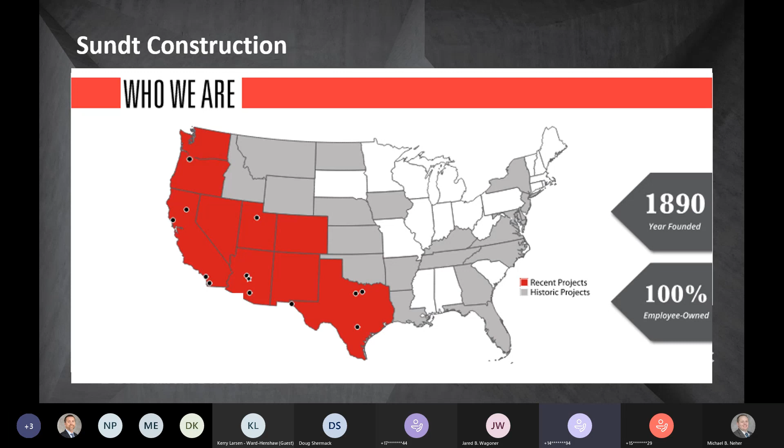This looks a lot like a typical pre-bid meeting. We're not calling this a pre-bid meeting. This is more of an informational session to give you guys an early look into the process so that you can see what's involved and be better prepared once we do advertise. And once we do advertise this for bid, we will have an official pre-bid that we will ask you to participate in.

Sundt is very big on providing safe job sites. We always want our craftsmen to go home the same way that they showed up to the job site. And to support that, we always start out all of our meetings with a safety share.

Today's safety share is regarding innovative PPE. Sundt is a company that we feel like we're always on the cutting edge of innovation, especially when it comes to things like technology, BIM modeling, 3D technology, use of drones. Those things are what you think of when you hear about innovation in the construction world. But today we wanted to talk about some of the innovation we are working on with our partners in PPE.

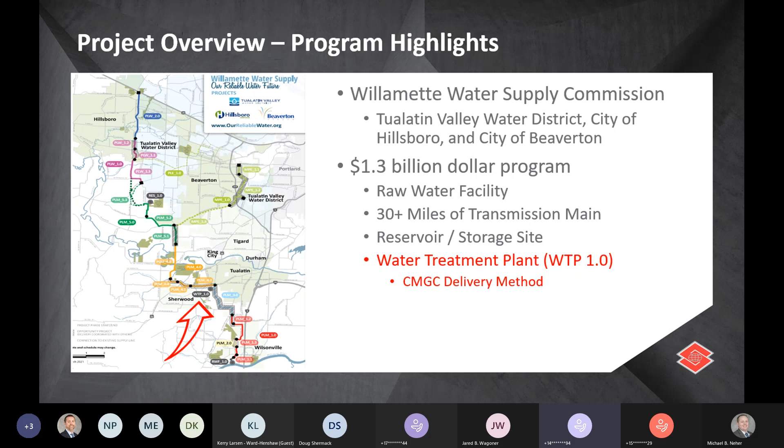So our project, though, consists of just the water treatment plant. Again, somewhat hard to see on this map, but we've got the arrow pointing to it here in Sherwood. The water treatment plant is a 60 MGD brand new greenfield site water treatment plant, and it's being delivered through the CMGC delivery method. So what that means basically is Sundt was brought on real early in the project to work with the engineer, who is CDM Smith, and the owner to help refine the design through value engineering, optimizing the project, providing various cost estimates throughout the process to help deliver a high quality project within the owner's budget.

Zooming in a little bit closer, the project is located basically at the southwest corner of Southwest Tualatin Sherwood Road and Southwest 124th Street. It's basically a greenfield site that is heavily forested. The site was strategically chosen for the water treatment plant. One thing to note with the location is the site or the facility is pretty much all basalt rock. So what that means is when it comes to the excavation, there'll be a significant amount of blasting to be able to remove that rock.

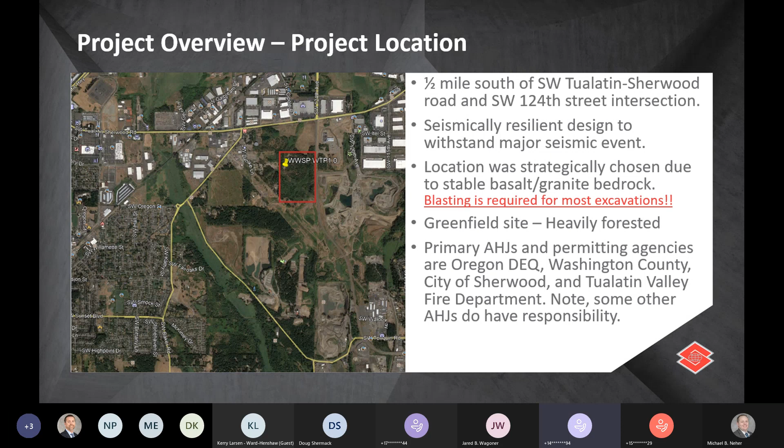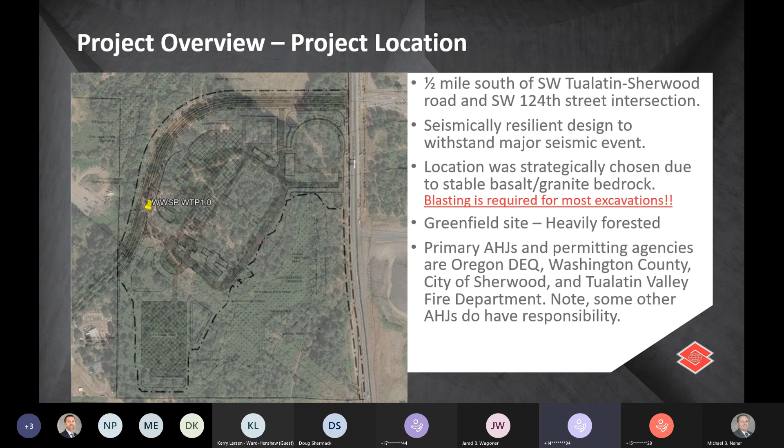We are going to be working with several AHJs, or authorities having jurisdiction. We've got some of them listed right here: the Oregon DEQ, Washington County, City of Sherwood, Tualatin Valley Fire Department. As I said, there are several, and we may not have all of them listed here, so we'll be working with a lot of different entities.

All right, so this slide here shows the overall site plan of the various new structures. I just wanted to hit on a couple of the stats. We've got about a 23 acre site, again all greenfield, nothing is there right now except a bunch of trees.

The water treatment plant consists of several treatment areas, and I'll walk through what some of those are in a couple slides later. We've got about a 15,000 square foot administration building. As with any water treatment plant, there's a lot of structural concrete. Based on our takeoffs, we've got about 40,000 yards of concrete.

Earthwork, significant amount of earthwork. The middle of the site is kind of a hill, so obviously that needs to get graded out. So we've got about 65,000 yards of cut and fill, about 180,000 yards of structural excavation. For those of you that have worked on water treatment plants, a lot of the structures are deep tanks excavated down into the ground, so that results in a lot of excavation.

You'll see in some slides later that we've got a significant amount of underground piping, and with that there'll be a lot of excavation associated with that. We're calculating in the neighborhood of 120,000 yards of pipe excavation.

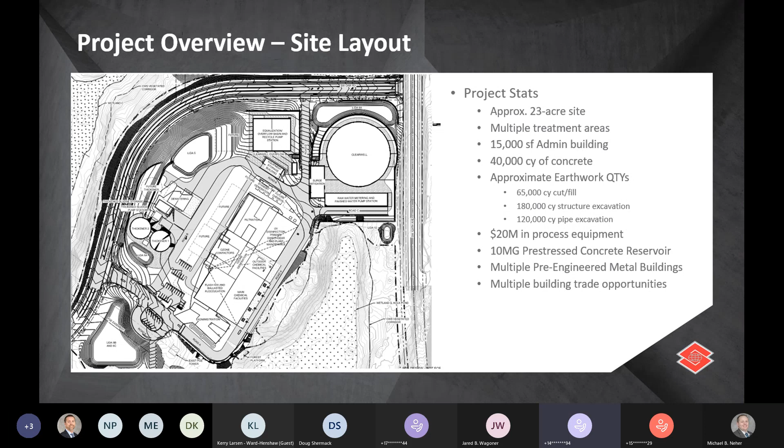All right, so zooming in a little bit further, I wanted to walk you through the layout of the facility and the treatment process real quick. This image right here is a 3D model of what we call the process building.

Over in the back left, you can see the call out for the administration building. That's that 15,000 square foot building that I mentioned. That's where your operations staff and members of the ownership group will have their offices. It's also got a lab facility in there where they'll do their testing of the water quality and things like that.

To the right of that is really where the water comes into this facility - that's the ballasted floc process area. After the ballasted floc, to the right of that is the ozone generators and the contactors, and then the water flows from there over to the filters. That's where the fine particles are removed from the water prior to going down into the UV disinfection structure, which is just the lower part of the picture where the filters are.

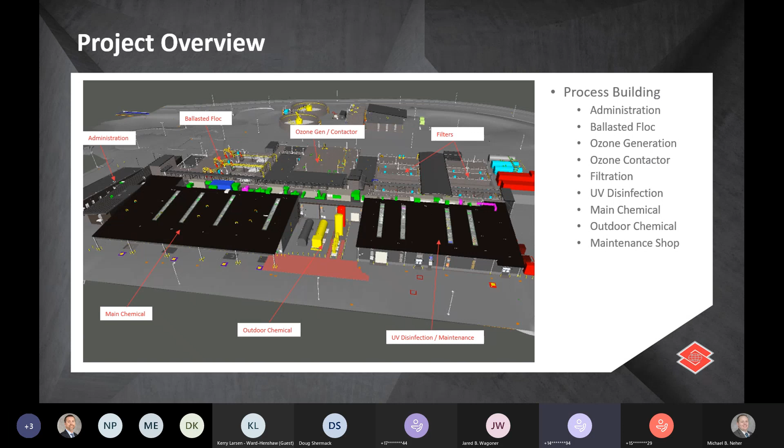In addition to those treatment processes, there is some chemical addition and adjustment to the water. So on the bottom left, the big dark rectangle, that's where the chemical facilities are housed, the main chemical indoor facilities, and then to the right of that is your outdoor chemical, which is your CO2 and liquid oxygen storage. So let's go to the next one.

All right, so we have two images right here. These images are of the same structures. The one on the left is basically looking out across the EQ and the clear well from the vantage point of the site. The image on the right is basically standing on the corner of Southwest 124th Street and Southwest Ore Drive. Southwest Ore Drive is the street that runs off of 124th and goes along the perimeter of the site on the north and west sides.

Looking at the picture on the left, in the front at the bottom, you've got the EQ overflow. That's basically a large, deep structural concrete tank, excavated in rock.

Lots of concrete used for storage of overflow water. Then in the background, that's your round tank, the clear well I mentioned. It's a 10 million gallon pre-stressed reservoir.

To the right of that is the finished water pump station. This structure houses some pretty large vertical turbine pumps that distribute the water through the transmission lines. That finished water pump station is a pre-engineered metal building.

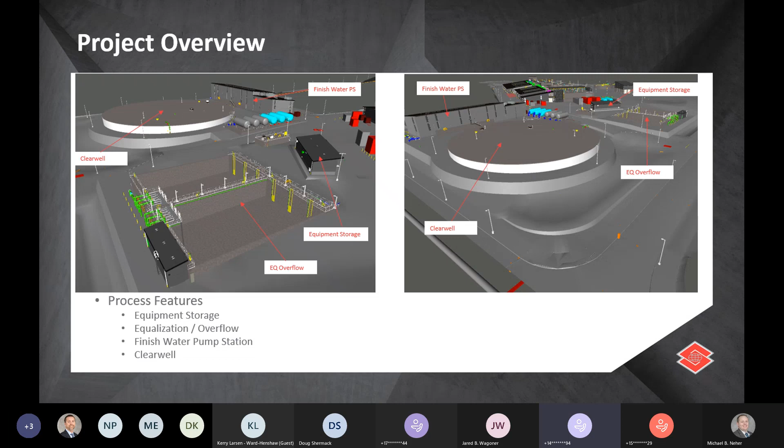Then to the right and towards the middle of the image is the equipment storage building, another one of the metal buildings on site. This is basically a large storage building, kind of like a big open shell for operations to store their equipment.

The last area we're going to look at is the solids handling facilities. As you treat the water and filter it, small particles get pulled out and accumulate, and you need to manage those particles or solids. To do that on this site, they are sent over to solids handling.

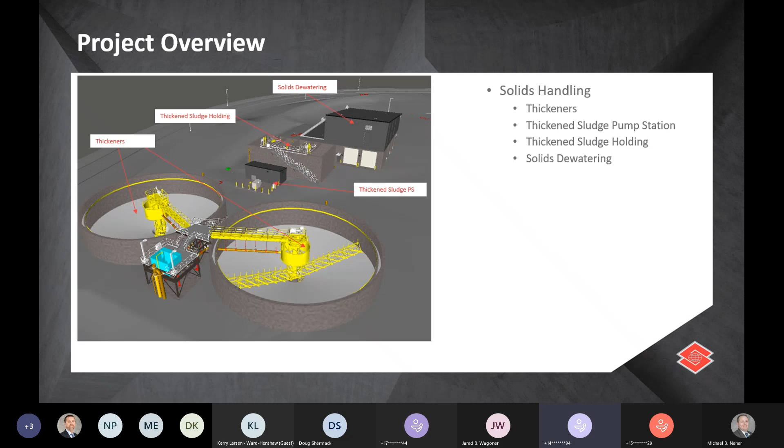The solids are extracted from the water in the solids dewatering building. This building has a couple of screw presses in it, where the water and solids are separated, and the solids get loaded into trucks and hauled off site.

All right, so now we're going to go over the project schedule. This is a very rudimentary schedule we put together, which aligns with a detailed P6 schedule we've already created. For this meeting specifically, we wanted to highlight the key areas we're talking about today.

Earthwork and yard piping are the two areas in green. The area in gray that just filled in is what our durations for concrete are expected to be. And then last but not least, the process, mechanical, and equipment.

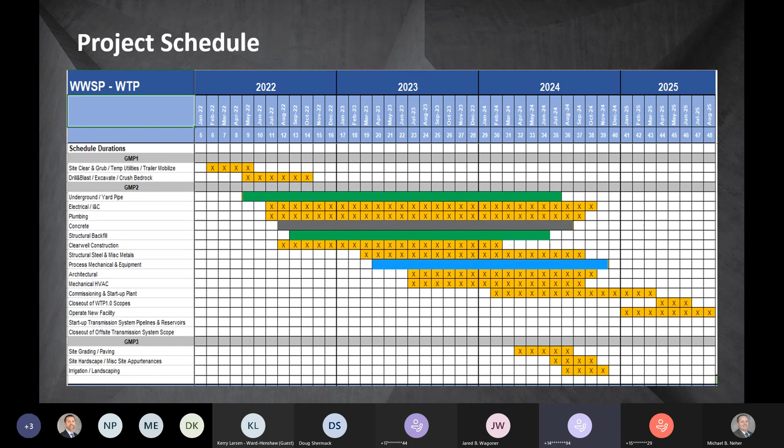So as you can see, really these three scopes that we're talking about today do cover multiple years of scope of work, and we'll go into a little bit more detail of what those scopes entail.

I just want to go over the bid schedule and bid opportunities. So talking about the bid schedule, for those of you that sat in on last week's initial kickoff meeting, we were reflecting 3 GMPs.

A recent change decided by the program is that we are going to merge GMP 1 and what was previously documented as GMP 1 and 2 into a single GMP. So that is now referred to as GMP 1. And then we will have a later GMP 2, which is more for...

Back-end type work: landscaping, hardscaping, sidewalks, asphalt, at the very end of the job. So we just wanted to convey that GMP 1 is going to entail 95% of all the scopes of work, including the 3 scopes we're talking about today.

Right now we're expecting to advertise mid-October. We'll have a pre-bid kickoff meeting within a week or two after initial advertisement. And then really, having an RFI deadline mid-November, addenda deadline early December, and bids would be due mid-December. Like I said, this was a recent change that the program and Sundt decided on.

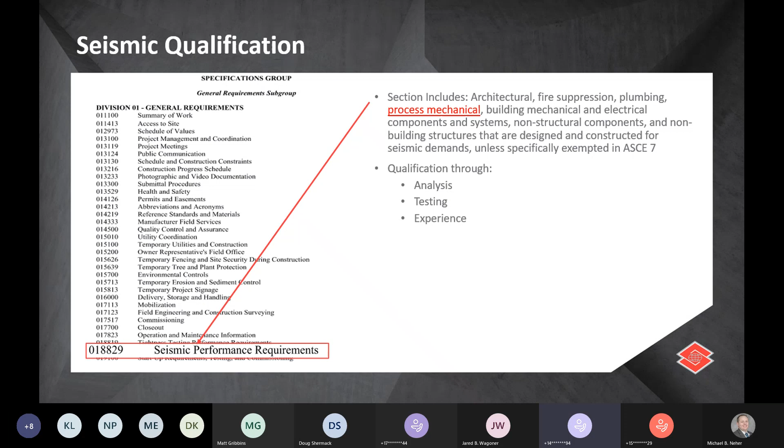All right, so now we'll get to the meat and potatoes of why most of you all have called in today. We'll be going over each division, talk about the scopes of work, kind of go through the overall scope, but then also talk about a few items or areas of concern that we see that we just want to convey to you all. So, Division 3, Structural Concrete.

As part of this package, it includes all divisions of the 03 specifications, including reinforcement. We wanted to reiterate that because sometimes there are concrete installation companies that just do formwork and placement and no reinforcement. We're expecting that the costs include all reinforcement.

The scope, like we mentioned earlier, is about roughly 40,000 cubic yards of concrete spread out across over 20 structures. We are considering splitting this overall package into 3 packages due to its overall size, and because we received some feedback from local contractors that are interested in the job but are unable to pursue a job of this size.

So with that said, we'd love to get feedback from you all to see if this scope is manageable for you, and if you support splitting it into multiple packages. We'd love to hear back any feedback you have, and I'll just leave it at that.

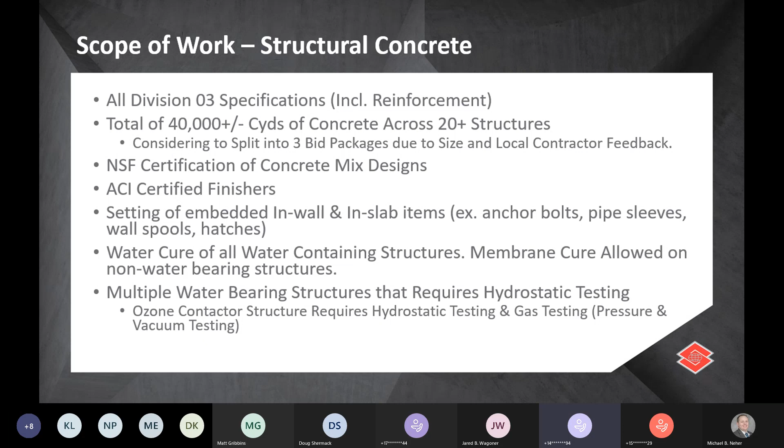Earlier I mentioned we talked about breaking the scope out into 3 potential packages, and this is where we'd like to really hear back from you all. All of the structures highlighted on the screen are what have structural concrete. The blue one, the big round one, is the clear well. That one, because it's a very specific type of construction, is not part of this Division 3 structural concrete. It is its own work package. But the structures surrounding it, shown in green, which we refer to as the finished water and EQ structures, those are part of this package.

What I want to convey here is, right now there's roughly 40,000 cubic yards of concrete. We'd love to hear back from you all on what your firms feel comfortable pursuing. If it's all of it, that's great. If it's less, depending on your experience, bonding capacity, or comfortability, please let us know.

The 3 packages we're proposing are the main process and admin building, shown in yellow; the pinkish purple color is the solid structures; and the green, as mentioned earlier, is the finished water and EQ structures. There are clear delineated lines between those 3 scopes of work that we think would make for manageable sections. The thickeners and solid structures would be roughly 10 to 15,000 yards. The finished water EQ structures would be right about 10,000 yards, and the main process building and admin will be right about 15 to 20,000 yards. Again, we'd love to hear feedback from you all on your thoughts.

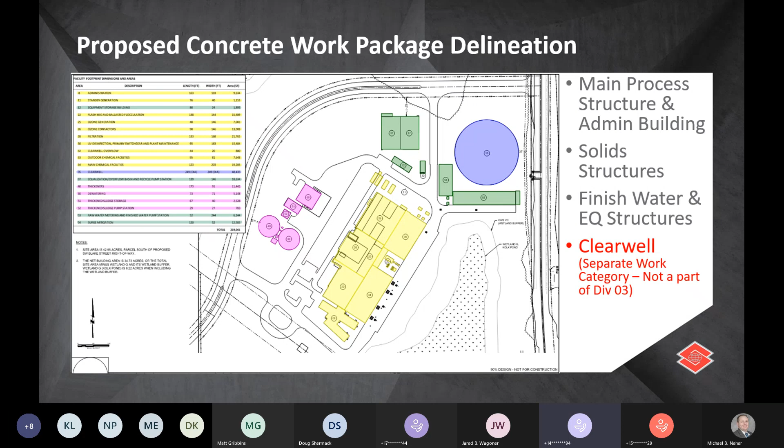Following along the lines of the proposed separation of this scope, I want to focus on the main process structure and admin building. As David mentioned earlier, this structure really includes 6 or 7 different processes. Right in the middle, toward the bottom of the picture, is your filter structure. The filter structure includes slab-on-grade as well as a deeper pit in the center, which is where your main process utility corridor is. Then you have your filter basins on either side of it with large 30-foot tall concrete walls.

You also have the ozone contactor, just up from the filter structure, which is also another large water-containing structure. That is the structure that also requires the vacuum testing along with the hydrostatic testing. And then in the structure as well, you have the UV treatment pit, which is about 20 feet down into the ground. That's really the deepest area of this entire process facility, but this building does have a lot of vertical walls and water-containing structures.

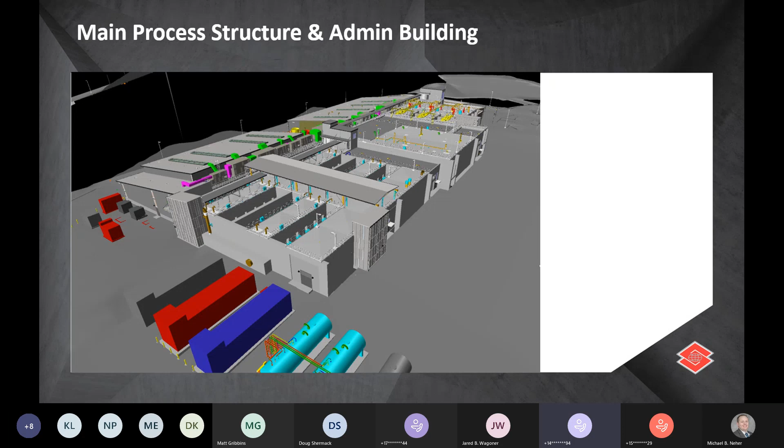Kind of a different view from the opposite side of the previous picture. At the bottom of the picture is the administration building. This administration building has a lot of spot footings and grade beams. The slab-on-grade is all at one elevation. There are areas of polished concrete floors, which will be part of this scope of work. There's also some areas of recessed flooring for different flooring types, ceramic tile flooring, carpeting, and like I mentioned earlier, the polished concrete floors.

Just above that and to the right, this large rectangular structure with the roof is the main chemical building. That is a fairly large chemical structure with multiple containment pits within it. Most of that concrete is due to receive chemical coatings and chemical paint protection on it, and there's a lot of cut up concrete work within that area.

There's a lot of containment pits, so you have lower slab-on-grades with pony walls that bring you up to a higher elevation, another slab-on-grade there. You have delineation walls and fall protection walls everywhere. So when you get the documents, it's a pretty cut up structure with multiple pours. Even though it's not a tall structure, it is a pretty complex one. There's not a whole lot of quantity, but it takes a long time to build.

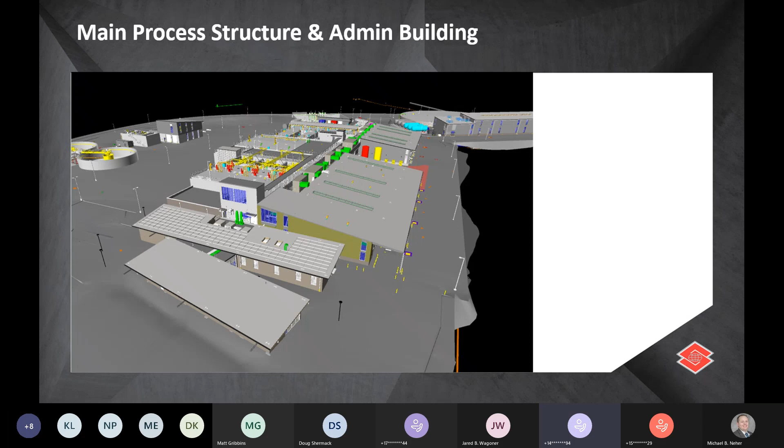Next, we'll go over the solid structures. You have the two thickener basins, the two round basins on the left-hand side, each roughly 100 feet in diameter. They are recessed into the ground about 10 feet, and the walls in total are about 18 to 20 feet tall. One thing to point out is the slab-on-grade slopes from the high point on the outside circumference of the circle down to the center, where it gets deeper at the pit.

Just to the right of those two structures, it doesn't give it much justice, but in the model it shows this little structure in the middle, which is the solids pumping station. That is actually about a 25-foot deep structure buried in the ground. Really, it's just a box in the ground. It's not a water-containing structure, but does have some vertical concrete walls.

The next structure over, the tall concrete one, is the solids holding structure, with walls about 20 feet tall. It's got 2 basins inside, really just meant to hold water, so that is a water-containing structure. The structure on the far right, the tallest in the picture, is the dewatering structure. That really just holds equipment and piping, and it does have a raised floor, a second level deck, a concrete deck, where trucks drive underneath and receive the cake or solids that come off the screw presses.

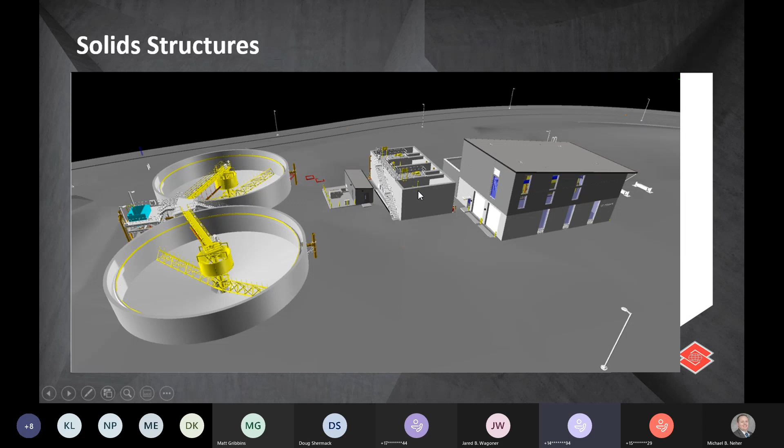So really what you see here is the 2 large thickeners that are water-containing structures, and the solids holding structure that is also a water-containing structure.

Next, to go over the finished water and EQ structures. Again, I want to point out that the large circular clear well is not part of the Division 3 structural concrete; that will be its own separate bid package. As David mentioned earlier, the large rectangular structure in the bottom left-hand corner is the equalization basin, EQ basin. Really, it's just a large water-containing rectangular structure, nothing too difficult, other than it is a water-containing structure.

This next structure over, we see the 3 teal-colored cylinders and the 3 gray cylinders. That is the surge mitigation pad, really just a thickened slab on grade with turned down edges.

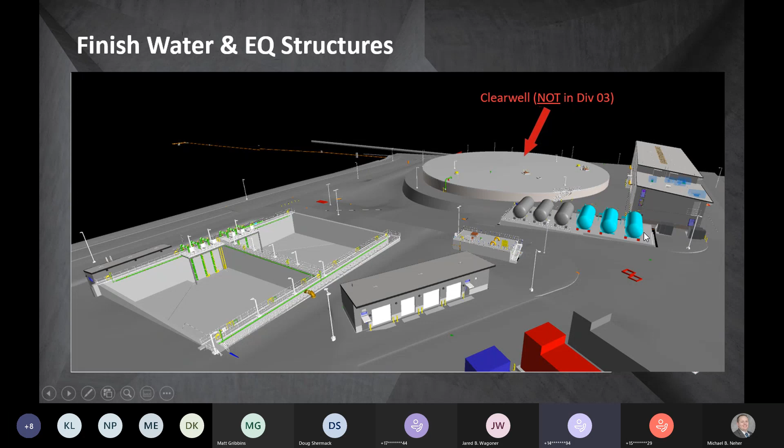What David mentioned earlier on why we wanted to cover this Division 3 scope of work is that water/wastewater involves very complex structures engineered with a purpose. These drawings and snippets from the construction documents show multiple elevations in the slab on grades, numerous vertical walls, and areas of concrete fillets where you have to grout back structures to get the water to slope and flow correctly as designed. We want to impress upon everyone that this isn't typical vertical construction like high rise or healthcare work—this is very complex work.

This is why we've designated this as a best value package, because we want to make sure the people bidding this understand the scope of work, understand the risks associated with it, and that we have the right partner on board.

A big thing with the concrete scope is you're not just the concrete sub focused solely on your own work—you've got embeds, pipe running through different walls, popping up out of slabs. So as the concrete sub, you're coordinating a lot with process integration, electrical, and all these different subs. The concrete scope is an integral piece to successfully getting this job built on time. Absolutely, good point.

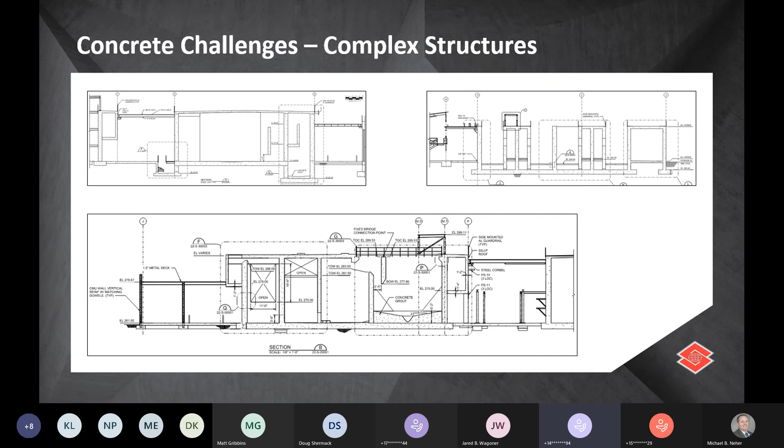All right, next we're going to switch gears and go over to the earthwork and utilities. I'll pass this off to Jared.

Thanks, Mike. So Earthwork and Utilities is Division 31 and 33. For our work packages, we're going to be combining these two into one work package—Earthwork and Utilities will be bid together as one work package. For the sake of the slides today, I'm going to break it back apart into its disparate elements. We'll talk about Earthwork first and utilities second.

Under the Earthwork scope of work, we would own all the Division 31 specifications—everything in that Div 31 belongs to Earthwork. Getting into the scope of work, there's approximately 23 acres of logging, grub and clear, which is one of the initial challenges on the project. There's quite a bit of vegetation on the site, including some poison oak, so that'll be a bit of a challenge.

Drilling and blasting—as mentioned previously, the site is built on a lot of basalt outcropping, so there's quite a bit of drilling and blasting to be done, about 65,000 cubic yards of cut, as well as 180,000 cubic yards of structural excavation for the drilling and blasting scope. That rock would need to be crushed to meet backfill specifications—we actually have 3 different specifications we'd be trying to meet by crushing this down to a usable size. At the subcontractor's discretion, they could choose to haul off the crushed material, or haul off the material and import material at specification, whichever they find most cost-effective for their bid.

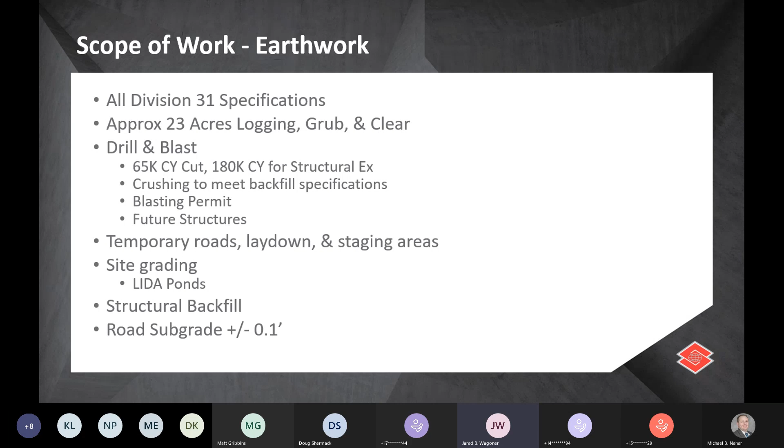Earthwork would own the structural backfill against all the structures once the concrete's completed, as well as doing the road subgrade to get it within a tenth. That includes all the curb and sidewalk as well to get the subgrade taken care of.

All right, so for the clearing and grubbing site setup, we looked at this as a 3-stage process. The site entrance is off of 124th Avenue on the right. The first stage is the initial grub and clear, just to get our subcontractors, equipment, and personnel into the site. We'd establish the initial survey and benchmarks and start working on tree protection as you work your way in, as well as installing the erosion and sediment control plan.

The second stage is bringing that haul road around the northwest corner down to the southwest corner, which gets us access into where our temporary construction trailers and our road and laydown area is going to be. Once that second stage area is cleared, grubbed, and set up, we'd move into stage 3, the main process area, getting that cleared and grubbed and ready to go. Once all that's done, we'll get the security fence installed and get rocking and rolling on the blasting.

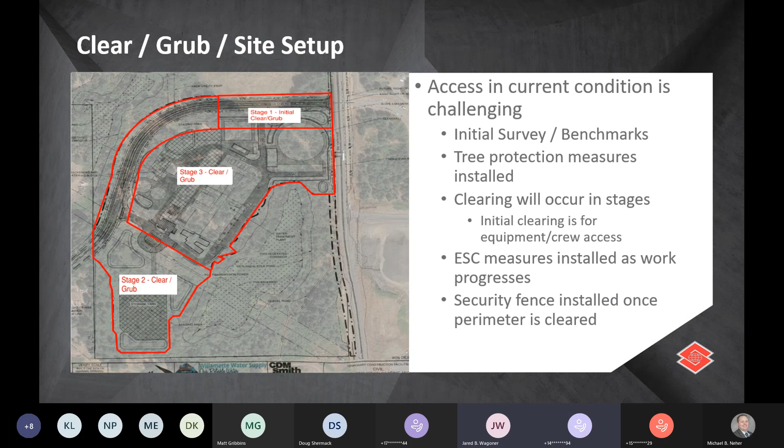So let's take it to the next slide for the blasting. This is a heat map showing the difference between cut and fill. The blue areas represent areas where fill is ultimately required based on the existing site conditions, and the red represents excavation based on the existing site conditions. You can see most of this area and most of the volume here is going to be a whole lot of cut overall for the site.

On the structural excavation, we're looking at 125,000 cubic yards of structural excavation. And then for the site fill, you're looking at 56,000 cubic yards of excavation and 66,000 cubic yards of embankment.

One of the challenges as we dig into the scope is exactly where this crushed material is going to be heading to. According to our project schedule, once this area is grub cleared, blasted, and ready to go, we're going to want to start handing these areas over to Division 3 to begin the concrete work. That's going to limit the amount of available on-site storage space for this material as it's waiting to get crushed and used as structural backfill. So that's one of the things we'd be looking to the earthwork subcontractor to work through and figure out a solution for, what to do with the extra material pending it being installed in its final location or ultimately exported from site.

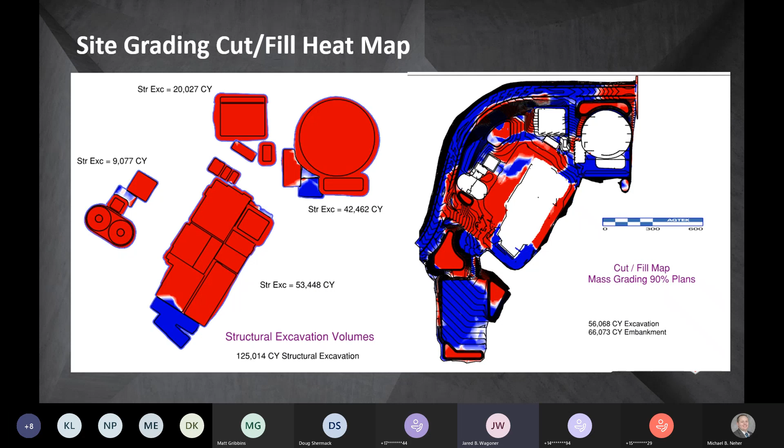So scope of work for the utilities, again, we're going to include all of Division 33 specifications into the utility scope, and that's going to include the underground utilities, your potable and non-potable water, sewer, storm drain, as well as the process piping for the actual process of the plant. That also includes installing the temporary construction water system, getting the temp water for dust suppression, as well as hooking it up to everywhere that we're going to need temporary water connected to.

The scope of work for utilities combined with that earthwork also includes drilling and blasting for those underground utilities, which adds about 120,000 cubic yards additional for those utilities. Again, crushing to meet the backfill specifications and acquiring the blasting permit, and that can all be done together with the earthwork.

The utility subcontractor would also include owning the purchase of all that underground pipe, the manholes, the appurtenances, and everything that goes with that. That includes doing the concrete encasements once that's placed, and doing the successful pressure test and disinfection of all the piping systems before we backfill that. So the pressure test and disinfection would be on the utilities work before we cap that and bring it inside the structures.

There's also some -- yeah, go ahead. Jared, just to clarify, we probably won't do the disinfection until the end of the project, so it'll probably be primarily the pressure testing. Okay, thanks Matt, appreciate that.

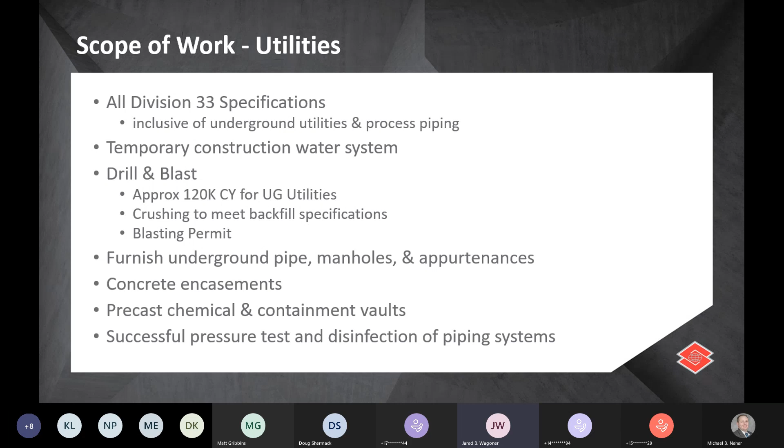In terms of quantities, a rough takeoff: we have carbon steel pipe ranging from 1 inch to 84 inch, about 2,800 lineal feet. The CCF pipe is a fiberglass reinforced polymer pipe, 1,200 feet of that, ranging from 48 to 84 inch. Ductile iron is going to be the bulk of the pipe on the job, ranging between 6 to 14 inch, 14,000 lineal feet of that. And then PVC, CPVC, 1 inch to 18 inch, 7,500 lineal feet, and a little bit of HDPE between 4 inch and 6 inch, 570 lineal feet of that, just to give you a scale of some of the underground utilities going into the site.

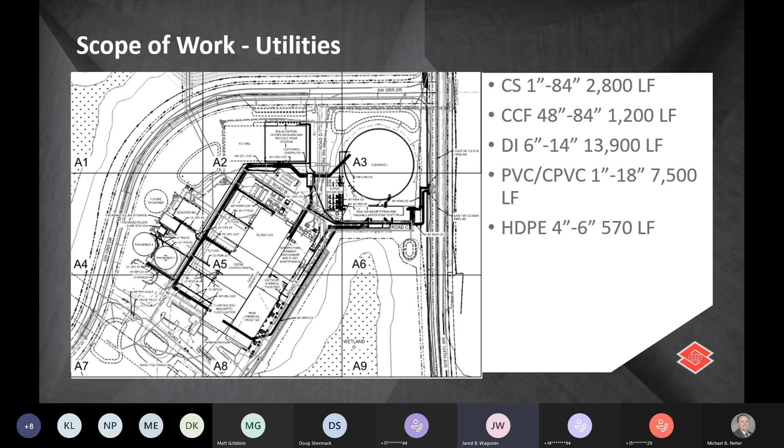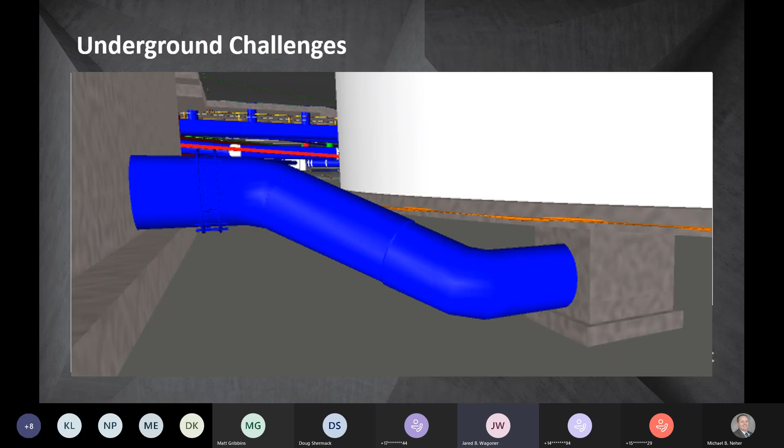Let's go to the next one. Same on the other side of the structure - this is connecting the clear well overflow structure to the clear well sump at the bottom of the inlet there. Again, you can see some of the challenges in coordination of getting that into both of those structures, as well as the layers of utilities in the area.

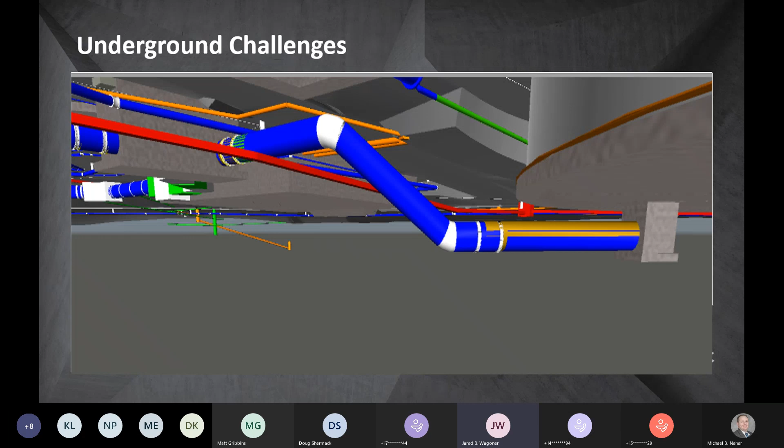Let's flip over one more. What we're looking at right here on the right-hand side is the clear well, the 10 million gallon clear well, and on the left, far left, is the end of the process building. This is probably the most congested corridor for underground utilities on the site, this little area right in between there. The point here is that the underground utilities and earthwork scope is going to require a lot of integration and coordination with the rest of the subcontractors on the job, and really digging in and figuring out the sequence of installation. The red lines you're seeing there are electrical duct bank. You can see some of that is going above or below the process piping. We've got plumbing lines, sewer lines, and process piping all working its way through this main corridor and main intersection area here.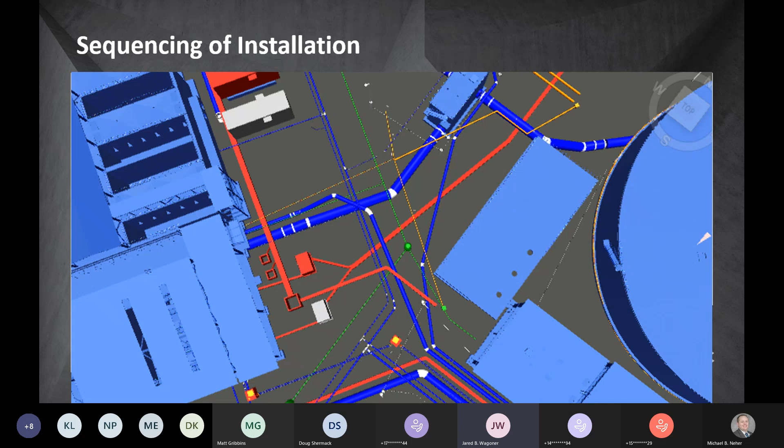All right, with that, I'll hand it back over to David to talk about Division 40.

So the last topic for today is Division 40, the process integration or process mechanical scopes. I just wanted to walk through at a high level what is included in this bid package. The full details of this bid package will be clearly listed out in the scope of work document, that's Exhibit A of our bid docs. And what you'll find when these are issued is that the process integration scope is going to include the supply and installation of all the process piping, fittings, the valves, and the pipe supports associated with that.

It'll also include the installation of your inline instrumentation devices. We're going to have a document that will help delineate the supply of the instrumentation. For talking purposes today, the majority of the instrumentation will be provided in the electrical scope. But there are several inline instrumentation devices that will get turned over to the process integration sub for installation.

In addition to the piping, the process integration sub will also be responsible for receiving, storage, and installation of the process equipment. Procurement of that equipment will be by Sundt through the CMGC process - there'll be a similar bid process to procure all that equipment. But once that is done, it will be turned over to the process integration sub for installation. The way I look at it is basically the process integration sub owns that equipment all the way through the manufacturer's certificate of proper installation. So there's support associated with that where we'll have the manufacturer on site for installation checks, and the process integration sub will support that in making final adjustments of the equipment to receive that certificate of proper installation.

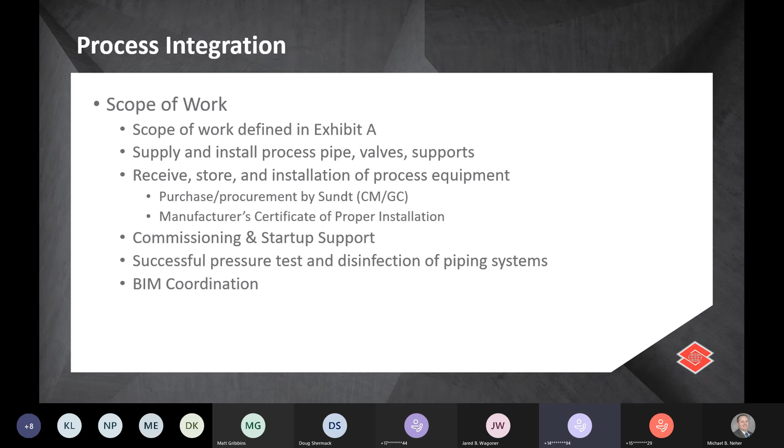All right, similar to the other scopes, we wanted to highlight some of the more challenging aspects of the project and the piping installation.

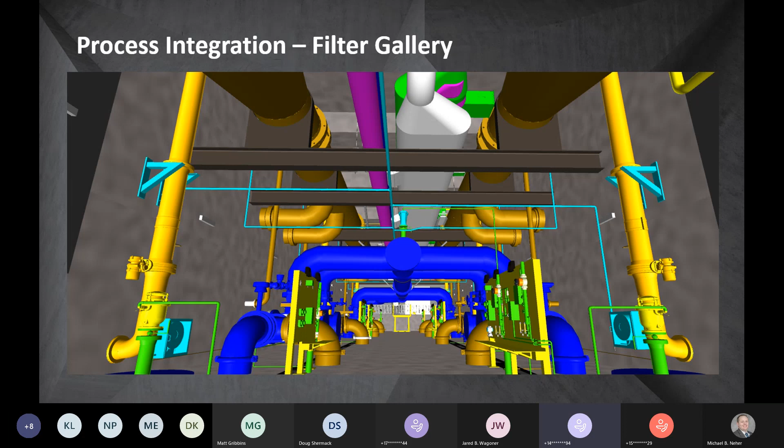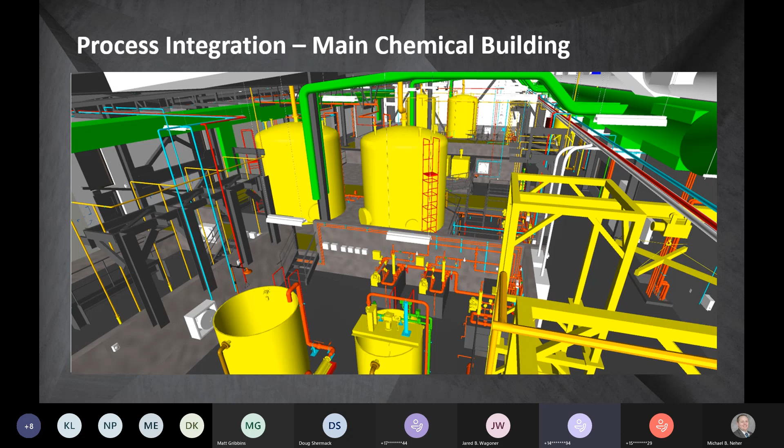As small as this part of the process is, there's several thousand feet of pipe that runs through here, various types, mostly plastic type pipes, some double containment pipe. Again, there's lots of coordination between the various trades, so this is another reason for the BIM integration and coordination between this scope and the rest of the scopes that we'll ask you to do.

All right, so that brings us pretty close to the conclusion of the information we wanted to present today, mainly on those three bid packages.

All right, so that's really the end of our presentation today. Just want to open it up for open discussion or any questions that you all may have.